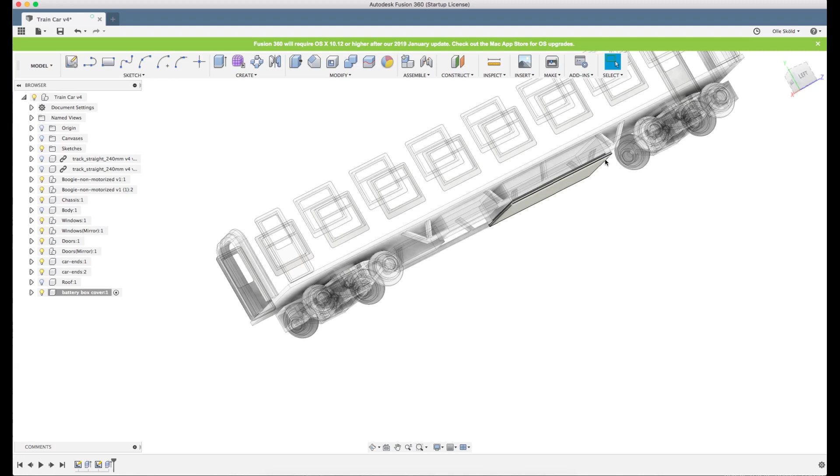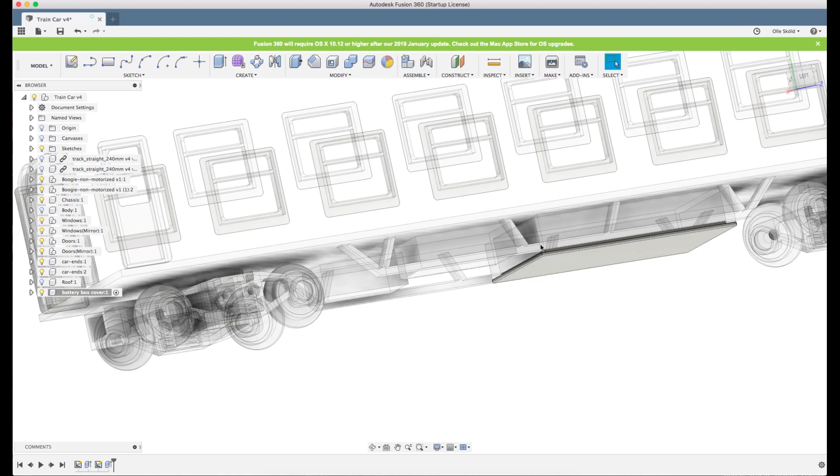And there's also another way. If you have a LiPo battery in here, you can extend the cables and have a charging cable coming out here in the edge, and then you can just glue this tight. I'll just leave it like this for now because you can adapt it. You can adapt it how you want, and that can be done with regular tools, just drilling a hole where you want the cable. I think that's easier.

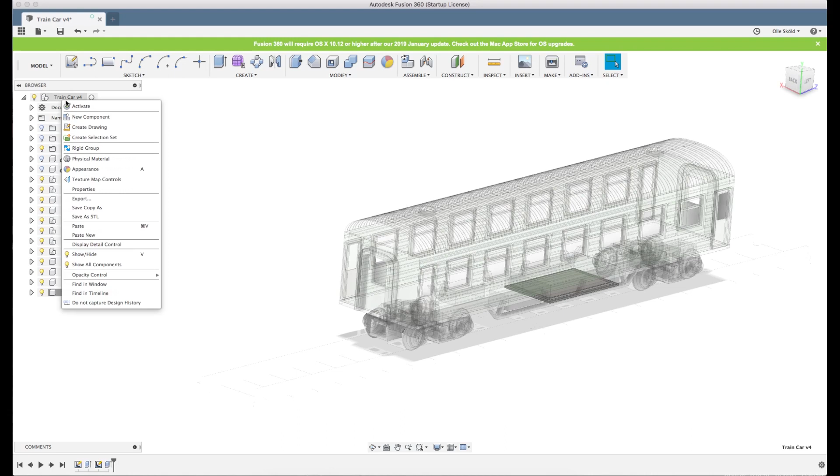So let's just see how everything looks now. I think we're sort of done. The roof looks a bit too... what do you say? I'll add a couple more of these round things, so it looks like a bit more is happening on the roof.

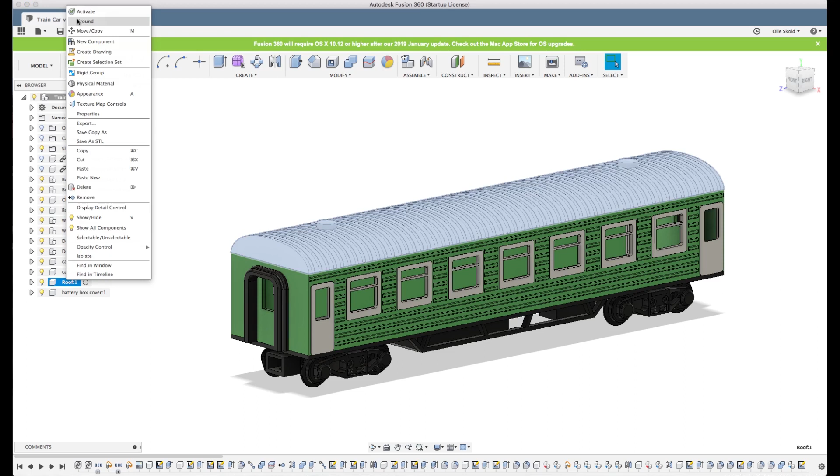So I will go back to this sketch, and there's another thing you can use here. If you want to work on one component and there's a lot of stuff in the way, you can right click on the component and choose isolate, because that hides all the rest.

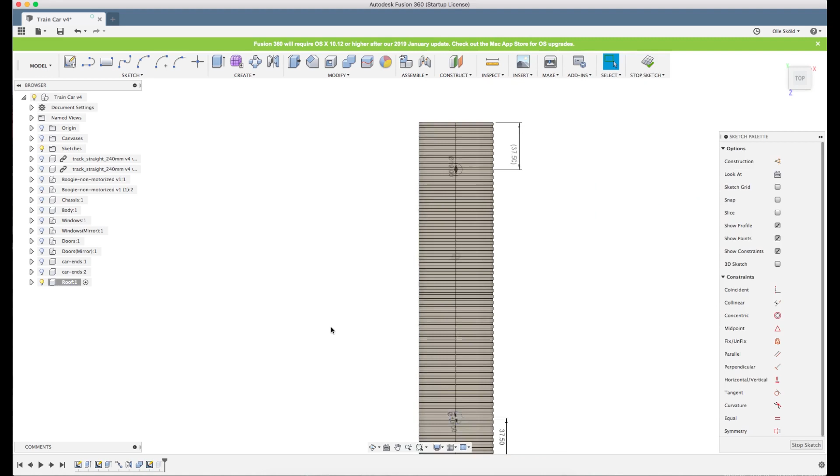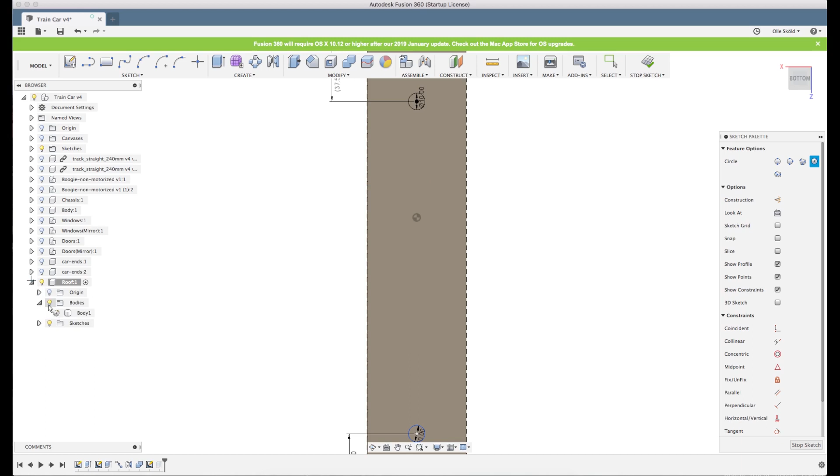And I click on the sketch, and let's see. There's tons of references there from all the things we did. I'm wondering why the center line actually snaps here, but not... Oh, now it does. Huh, that's strange.

So let's put, we can put 3 more of these. Yeah, this is really strange. Now it snaps. It didn't do it before. Yeah, Fusion has these kind of strange things happening sometimes.

You can see now it's not snapping, but if I just hold it over here, it starts. That's weird. Oh, I messed it up. Oh no, I didn't. So let's see the dimensions here.

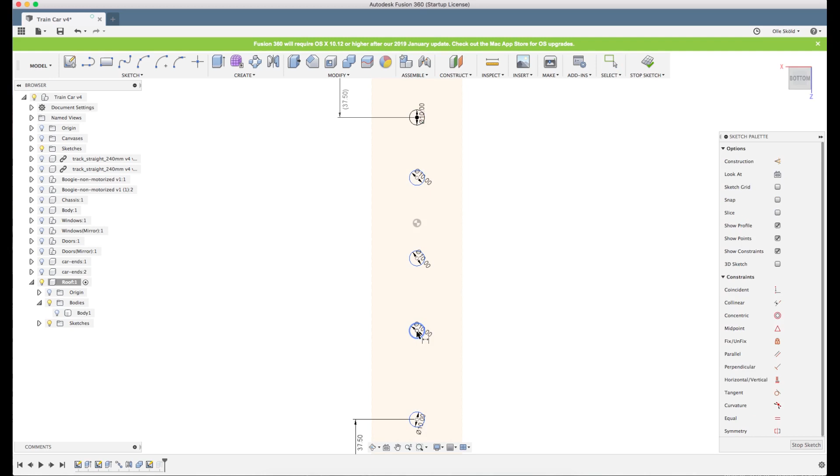Let's just make it 60 for now, because I thought I'm gonna do like this. I'm gonna see how much we have here. We have 199.

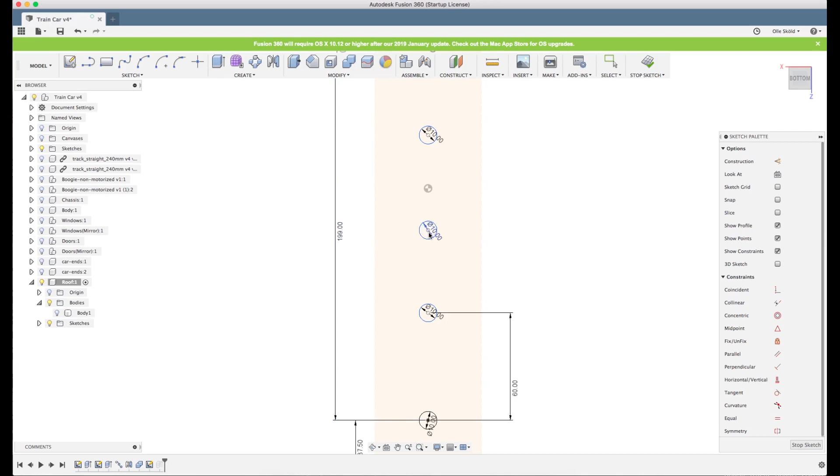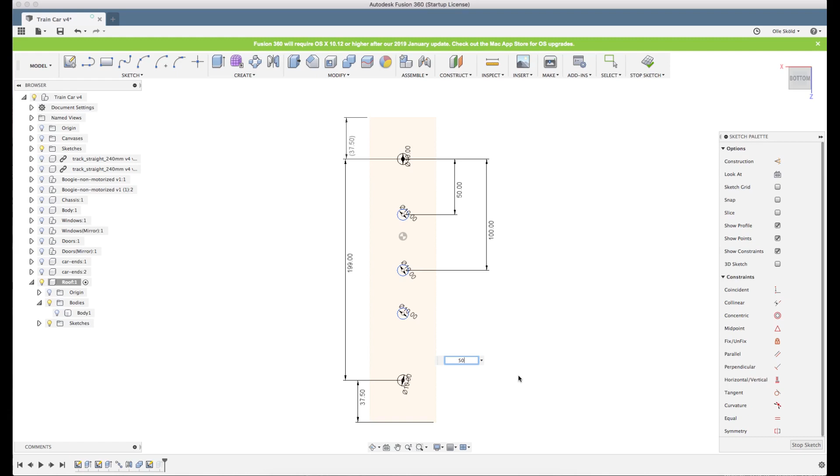So with that said, we want to place this at around 100. That's close enough. And then we want 50 here if we want this to be at an even distance, and this one as well. There we go. Now we have a few more of them, and at an equal distance.

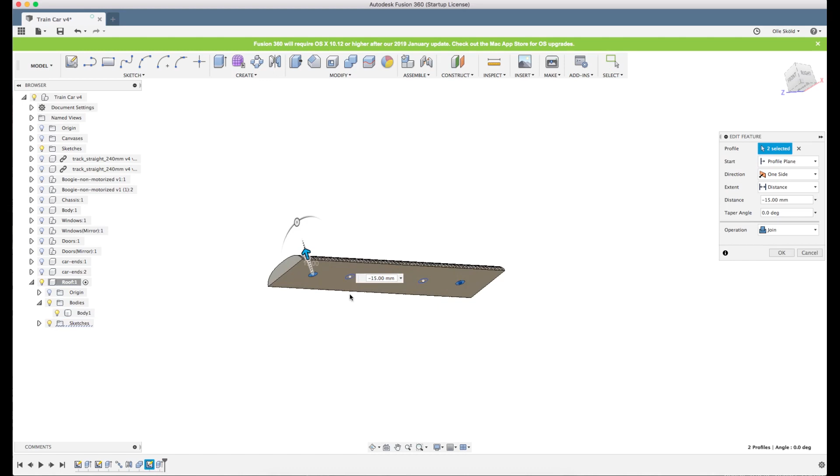So let's see what's going on. Let's double click on this extrude again and choose these new circles we made. There we go. Now it looks like a little bit more is happening there. That's good. I think we're done.

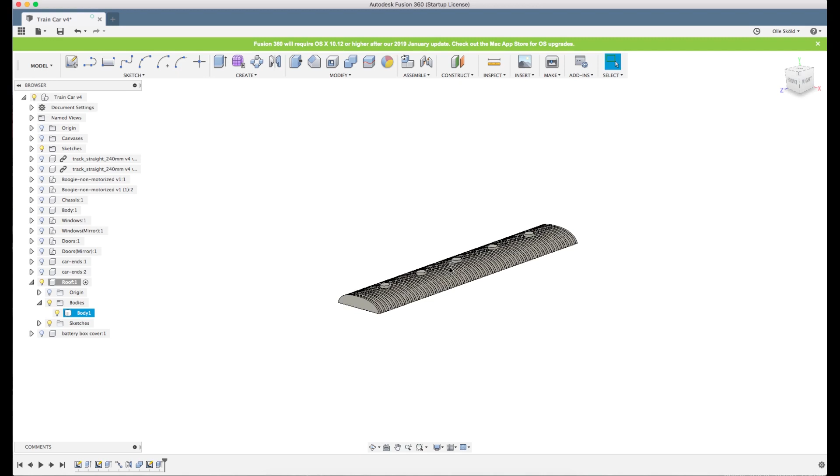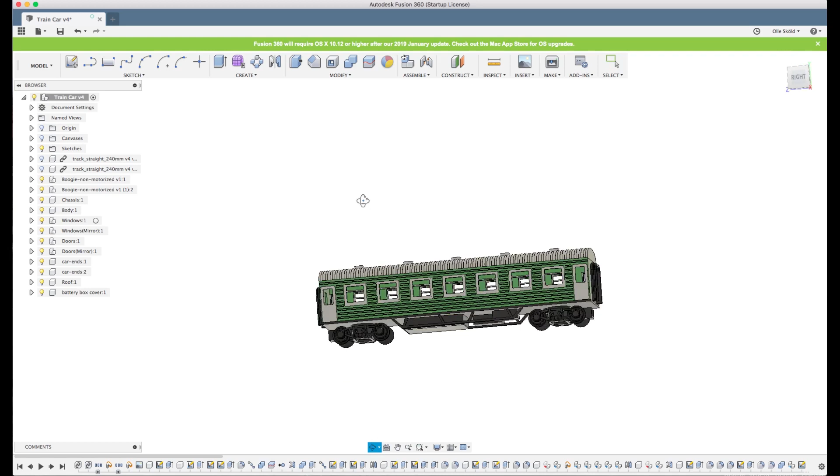So now we're gonna see how we split this and arrange it for 3D printing. You can right click and unisolate when you're done if you did isolate something. And we click activate on the whole thing, so we see how it looks. It looks pretty good in my mind.

We can take a look in perspective as well, and also we can highlight the track again, so see how it looks with the track. That's good enough for me.

Now I can show you a few things to keep in mind here: when you put a name on a component, it does not put a name on the body, so the body only has a number. So what I try to keep in mind is I give these a name, so when I export them as STLs I have a consistent name, so I know which one I've exported. I call this main body, because all the ones that don't have a name are called body, so if you call it body, you don't know if it's Fusion's name or yours.

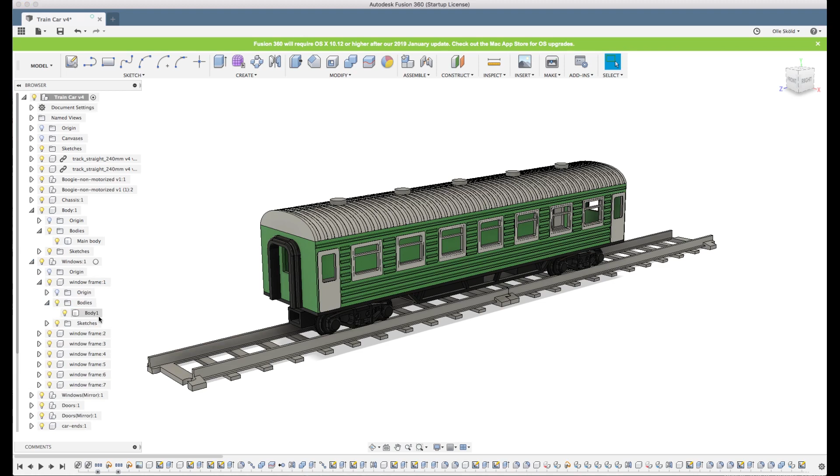Then we take one of the window frames, and now we can start exporting them as well as we go. Frame parts, window frame, and we right click and export as STL.

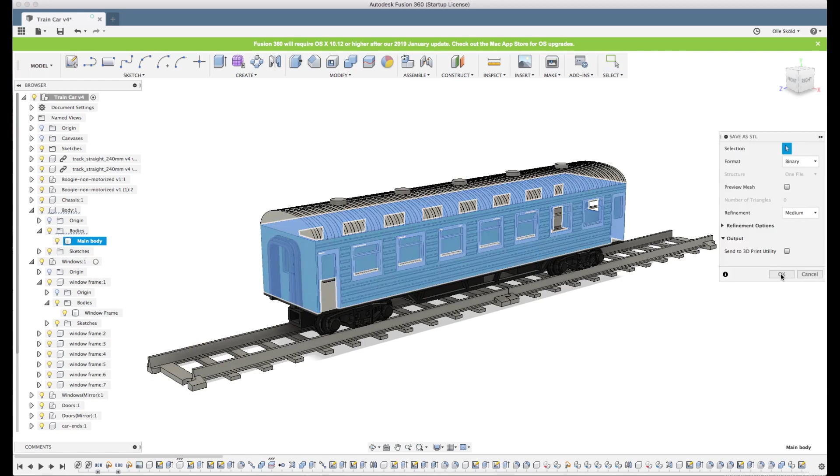Now there are situations sometimes where it will actually not work, where you'll get an error message when you try to export as STL. That means there's something wrong with the geometry, and it's hard to say exactly. This could be a million reasons, so it's impossible to give a general tip for that. But you just have to go through the geometry again. One tip is that if you have complex geometry like paths and things, you can try to remove some things and then try to export, and that way you can pinpoint which feature is preventing you from being able to export it.

Oh, I didn't export it. And we have the ends. Oh, that's weird.

And then we have the roof, and before I export the roof I will do some tricks to it. I will show you a way to adapt it for 3D printing.

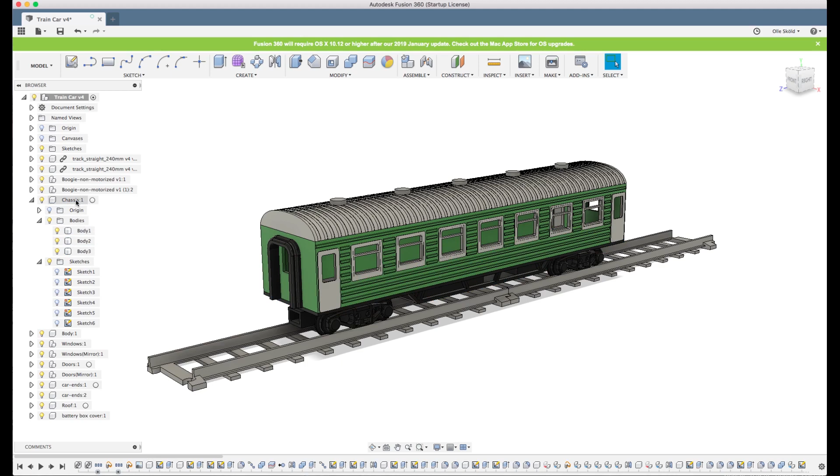And I see now that we did not actually finish this. We have to combine the bodies here. We were too fast to make the battery box and stuff, so now we will activate the chassis and combine these three geometries because they will be printed as one.

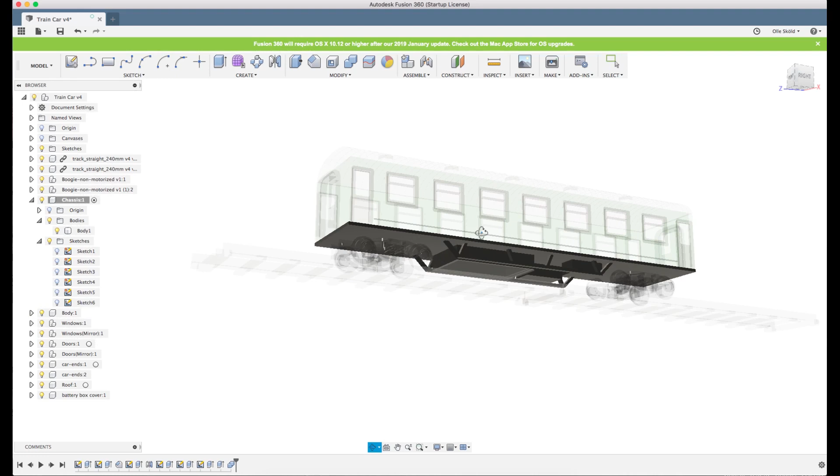Oh, there's actually one thing more I can show you that can be of interest here. Let's deselect the chassis and I will try to show you. On the bogies there is a plate that is rotating. That's the interface against the chassis, and that actually has a small thing here - I don't know what to call it, but this can be a stop to prevent the bogies from freely rotating.

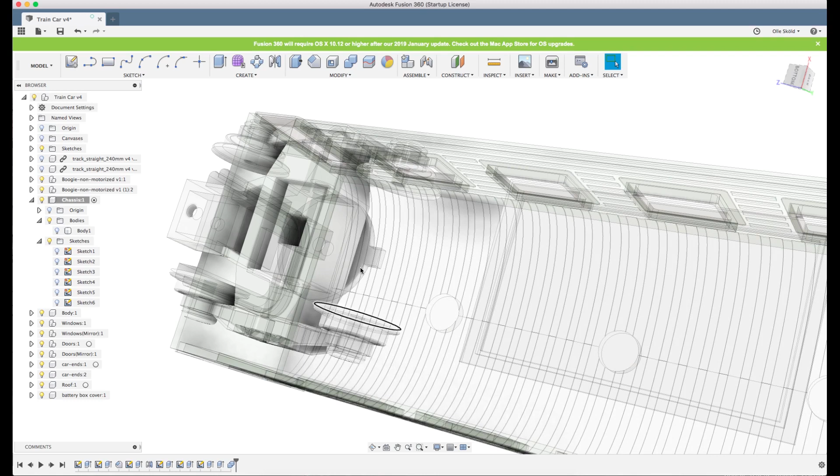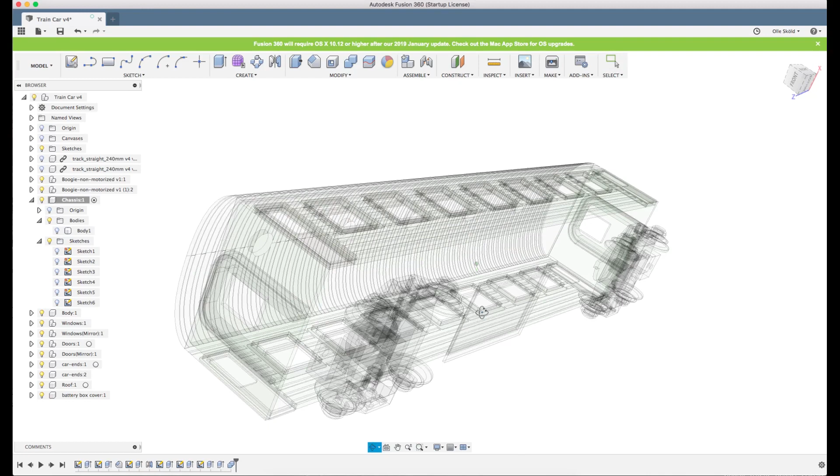The reason for that is that it's easier to place it on the track if you have a maximum angle here that prevents these from rotating freely. It's not a must, you don't have to have it. You can have it plain like this, and just put an M3 screw in here and screw it to the chassis - that's good enough. But I placed it on some of my cars to prevent the bogies from just freely rotating, so you could do that if you want. I'll leave this like this for now.

So let's export the chassis as well.

So now it's only the roof left, but we're gonna do a trick with it to make it easier to print. I did that with the other passenger car that I have on Thingiverse. I can just show you first how that looks.

With this one, to get this really nice surface on the roof, I split the roof into several pieces. So it prints like this in 3 pieces, and it prints vertically because that makes the shape of the roof round. If it was printed horizontally, you would get the layer lines here, which would be really ugly. So that makes a huge difference for the result. This is without any treatment.

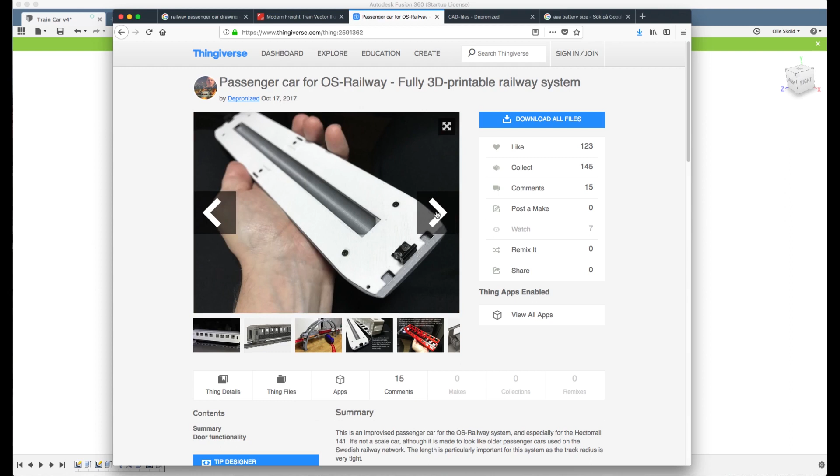And you can see here that this is a bit more advanced design because you have these rooms for cables and for the lights and stuff. It also has doors that you can open and shut. But you can of course put more time into this. This is just a basic tutorial to show how this process, how you work with this.

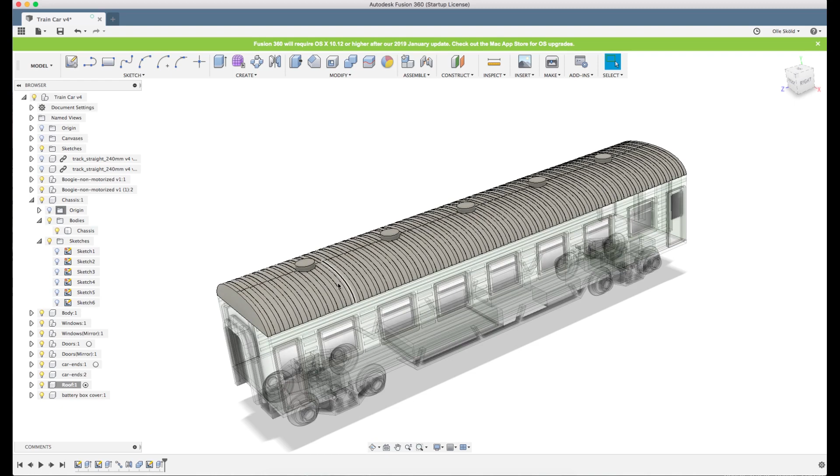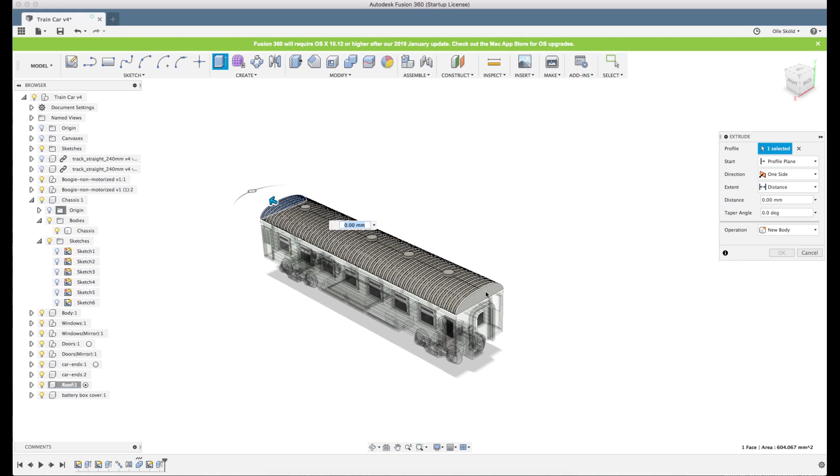So let's do the same thing with the roof here, but I will only split it in 2. Let's just see how long we made it - this is just an ugly way. I click on the edge and I click extrude, and then I click here. And if it wasn't for the million references there, it would go fast, but no, Fusion needs to think - oh, 274 millimeters.

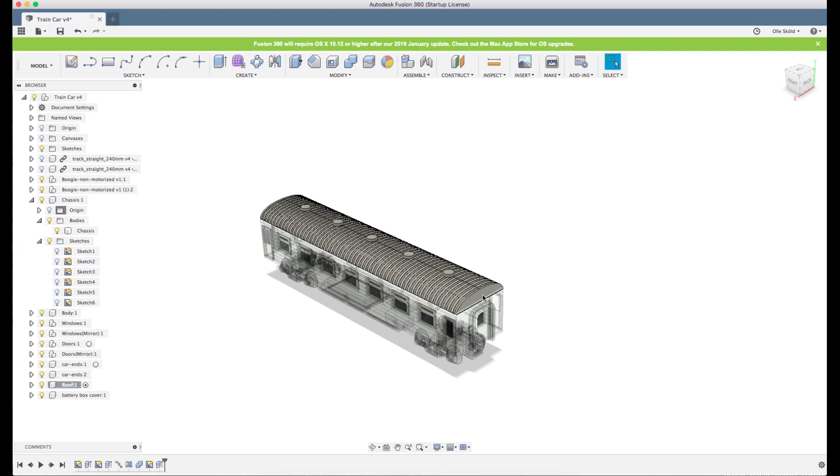So what I will do, I will put a plane. If I right click here on the edge and I create an offset plane, and I put this right in the middle at 137. That's right in the middle.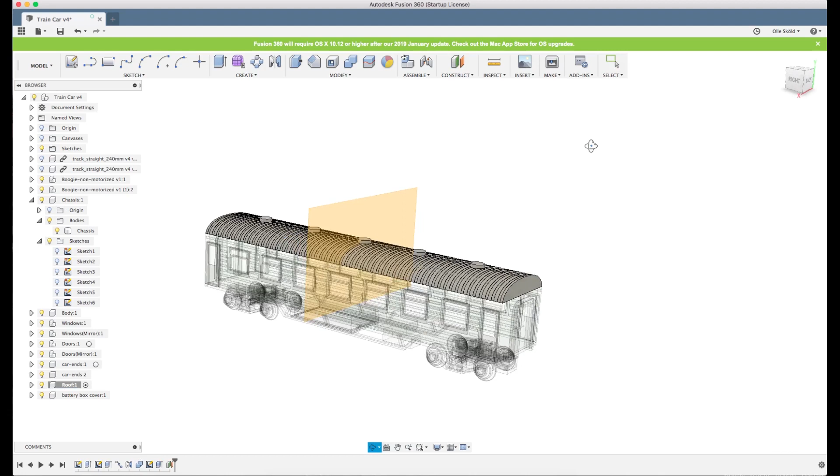So what I do now is I will actually make a copy of the roof body. And I will deselect the first one so I have the original left there, because now I will really mess with the new one for the printing. So I will split it in half. I already had the body selected, so if you didn't have it selected, just click here or click on the body.

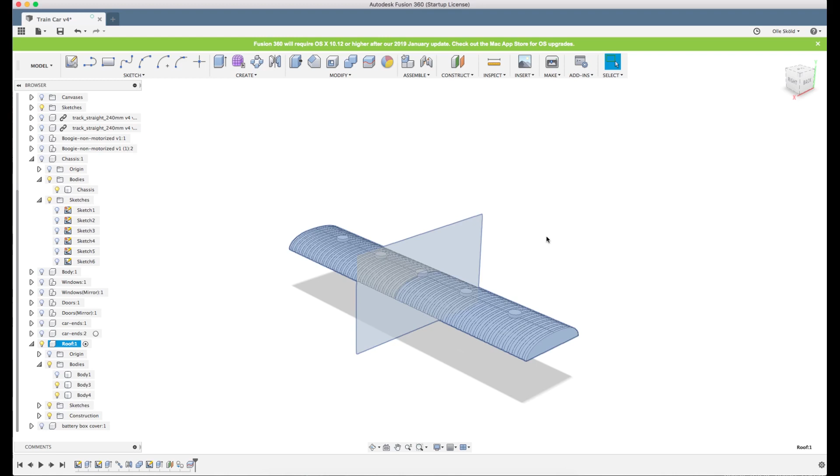Then with the splitting tool I would use this offset plane that I created. So now it's split in 2, and I will isolate this part so it's easier to work with it, because what I will do now is put both these vertically. Move.

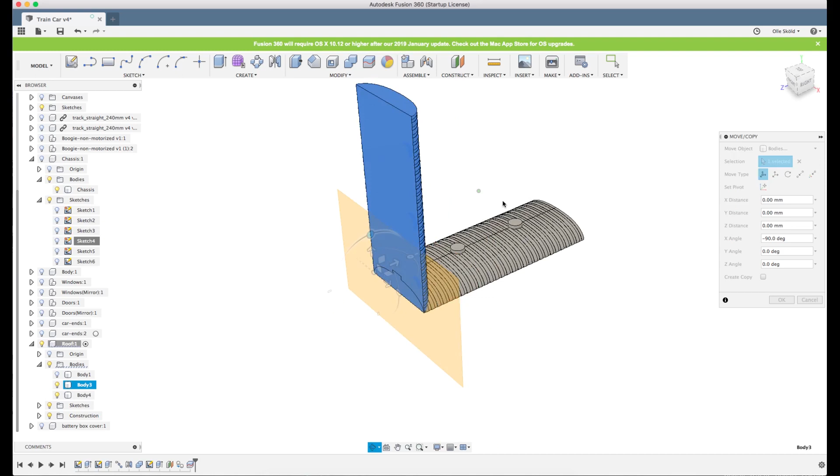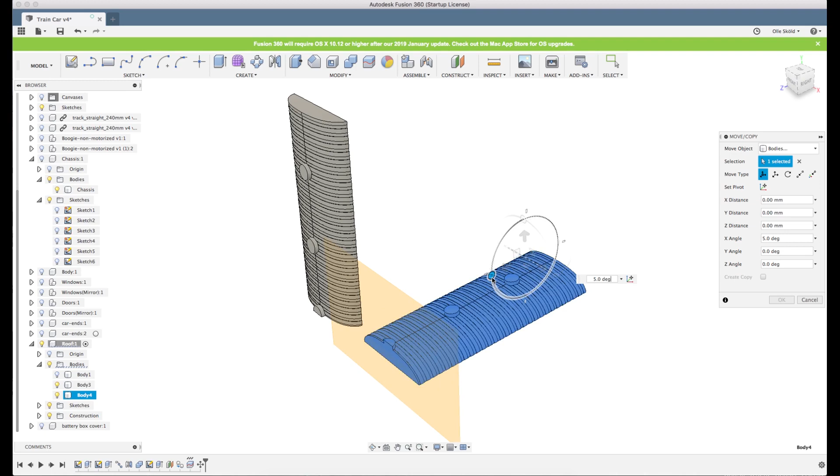I move it 90 degrees, and roll it around 90 degrees, or 270 degrees, sorry, like that. And I will take the other one as well and move it. I have to do it like this because I want this centerpiece, the small protrusion there, to be on the print bed, so that's why I'm turning it this way.

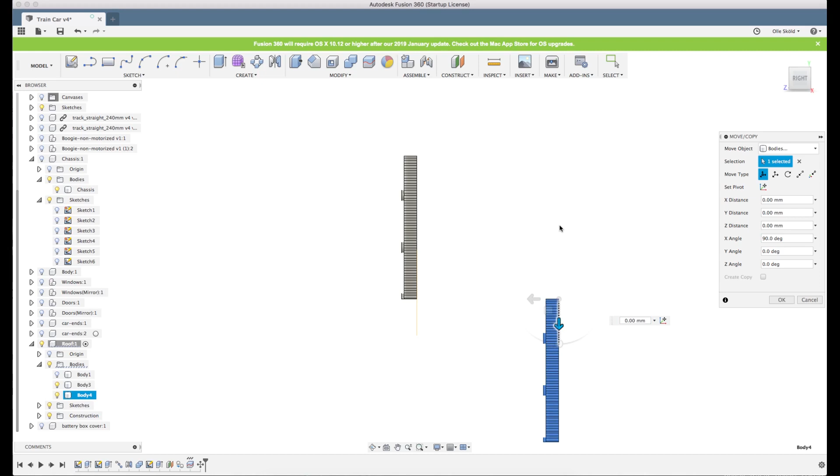Oh, I still have perspective. I don't want that, I want orthographic view. Let's first turn it around 180 degrees.

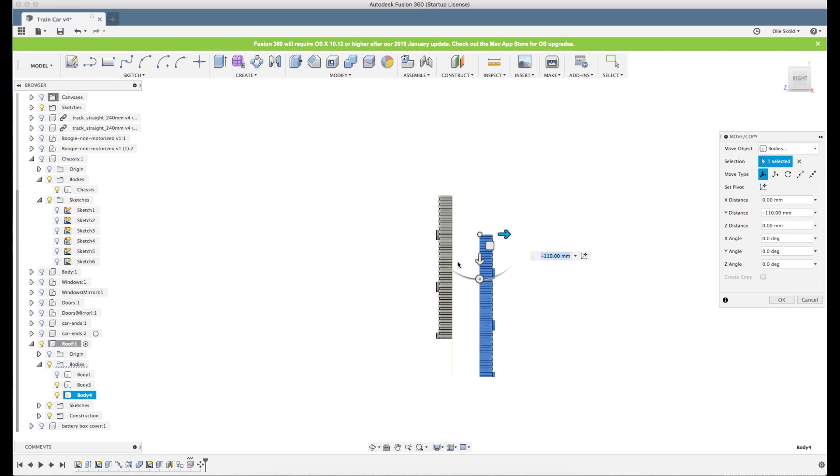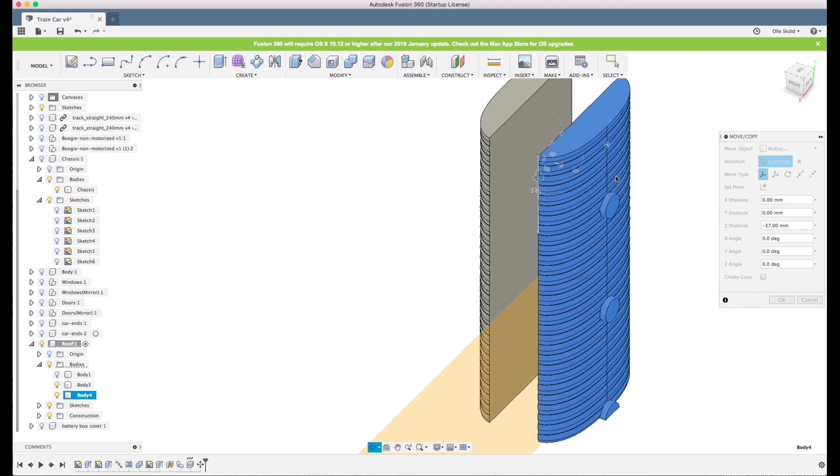Let's move these closer, but not too close, I'm gonna show you why. There they are, exactly the same height, and they're in the same place as well. So that's good, so let's keep them like that.

And now we're gonna do the weird part of this. Fusion has to think a bit first. So yeah, let's click the surface here and create a sketch.

And now we will create a support structure that will hold these two together while they're printing. And we want it to be 0.4 millimeter wide. Oh, 0.4, not plus 0.4, because that's usually one nozzle width.

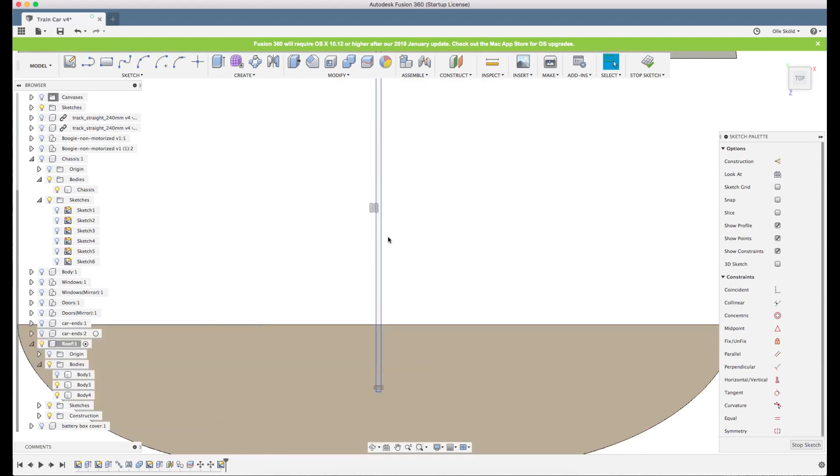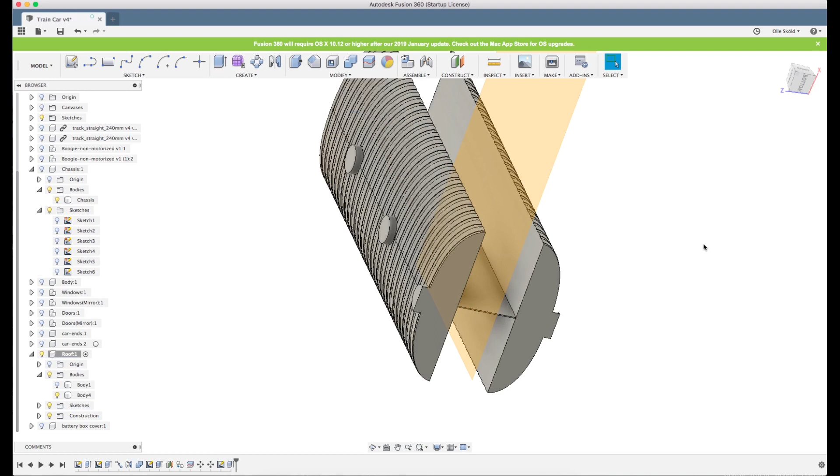And we click E for extrude, and we click the arrow, and we click here. Now Fusion thinks we want to cut, but we don't want to, we want to join. There we go. Now the reason we're doing this is that, oh, now we can see we have some small anomaly here. They're actually not at the exact same height.

We'll see if that actually matters when we're putting them on. You can see here that it's actually, let's try to fix that.

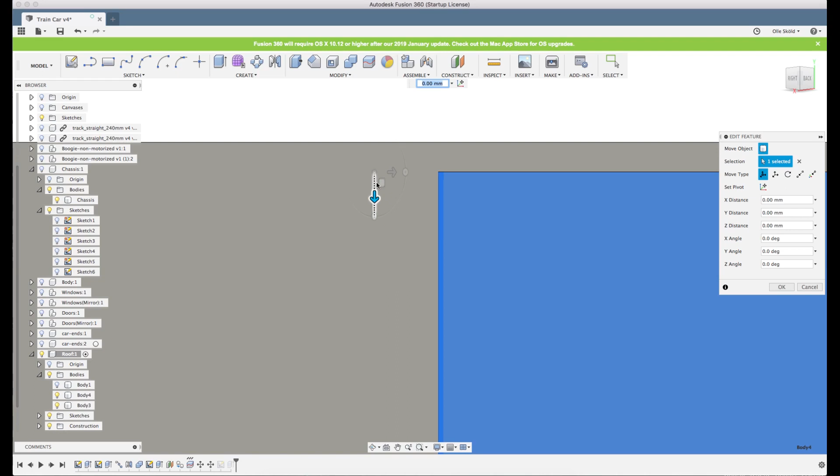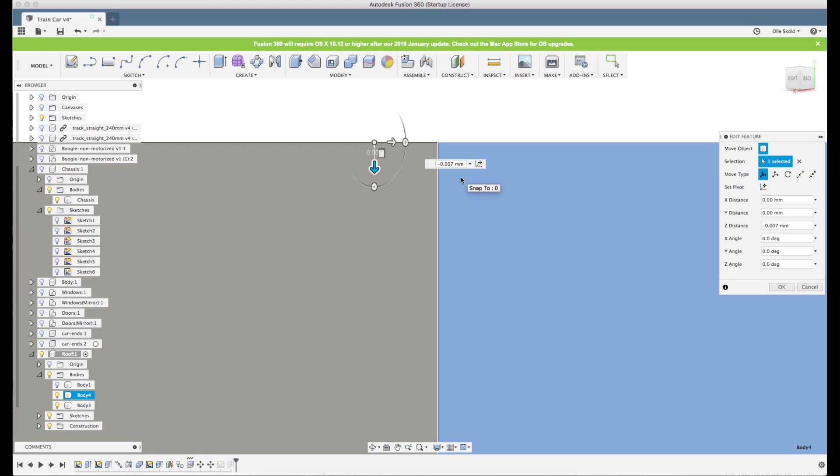That means some of the dimensions we had in the beginning were not exactly right. But we zoom in as much as we can and we try to fix this. This is what you get for not putting in all the dimensions. I think this is good enough.

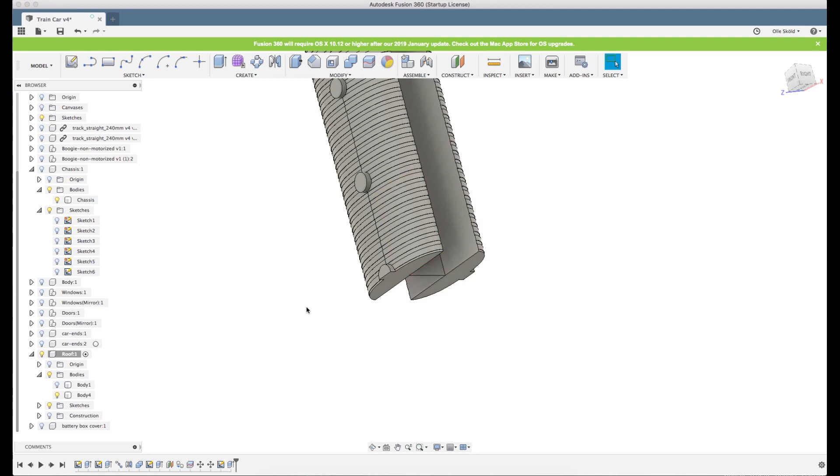A lot of times it's worth to have a few kinks here and there instead of being super precise with entering all the dimensions everywhere. This gap that is here, still here, is too small to matter for the printing. So let's just keep it that way.

So now we have, this is all one body, and what it does is that you can print it vertically like this, and the support in between here will mean that it's less likely that the printhead will knock one of these over. So we print this as one part, and then you just break off this 0.4 millimeter support in the middle. You just use a knife or a sanding paper to clear the remaining parts of it. And this works really well.

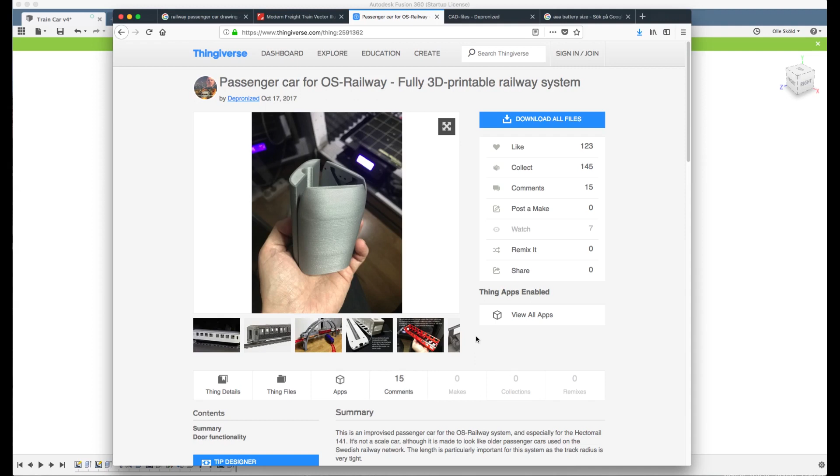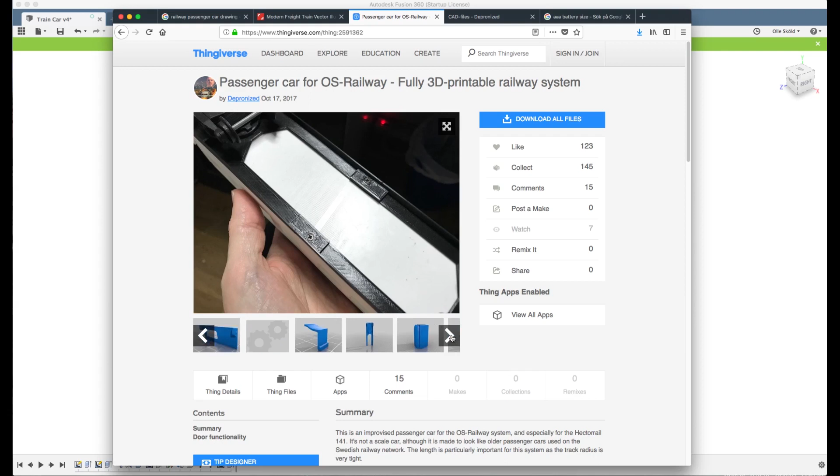I maybe have a picture of the STLs here. Yeah, here they are. It is the same kind of thing going on here, but it's 3 of them. But it's the same principle.

So we'll export this. We'll call it something first. Roof print adapted.

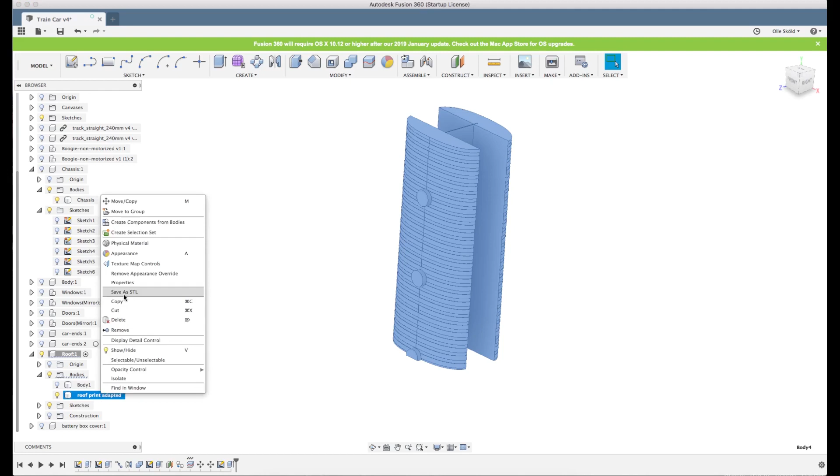Also, if you split it to even more parts, there's less risk of it being knocked over. This is still quite high, so a bit of a gambling, but then don't use too small layer heights here, because that will mean trouble. Use at least 0.2 millimeter.

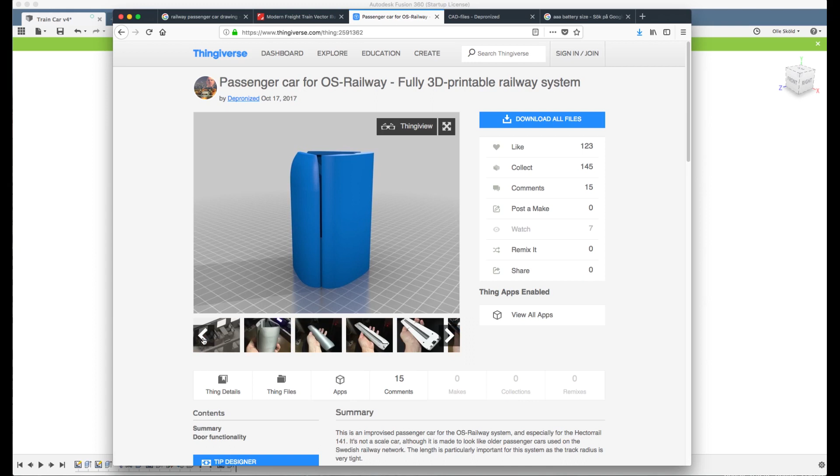The ones that you saw in the picture. Oh, sorry, not that one. The ones here. This is done with 0.2 millimeter, and you get a surface like this. I mean, better than this is not desired on my part, at least.

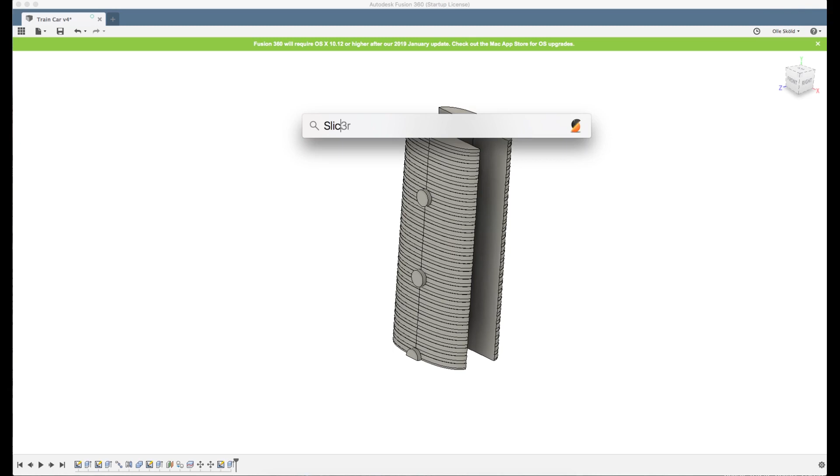So now we have exported all the parts, so let's see how they look in Slic3r. I used the Prusa i3 Mark II, and I use Slic3r Prusa Edition to slice these parts. But if you use Cura it works well as well, but I like Slic3r. I think it's better than Cura. I get better results in it, at least.

So, so let's see. Train parts. Let's first look at the main body and the big parts and see if they fit on the print bed, or if we need to split them in some way.

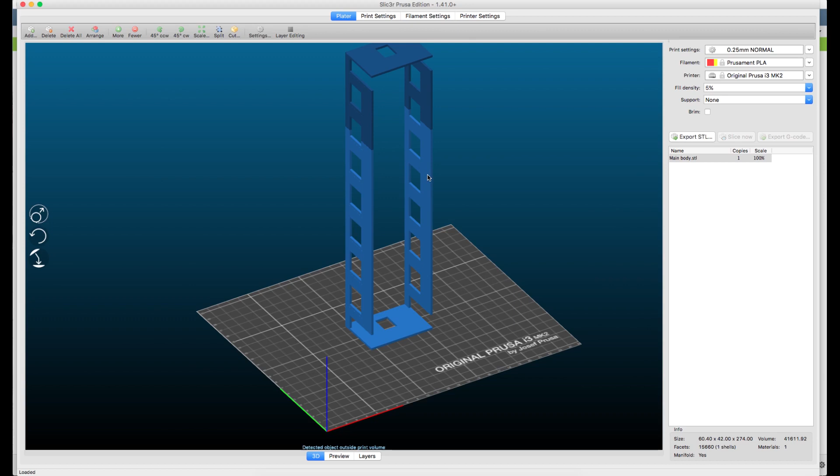And Fusion, as you can see here now, has another axis orientation than the usual 3D printing slicing softwares, and you can change this in Fusion somewhere. I haven't done that yet. I should have, because this is annoying, but you can do it.

So now we're seeing that we might have some problem here. It's a bit too long, actually. It is too long. Or there might be a chance we can fit it in here if we work with the angles.

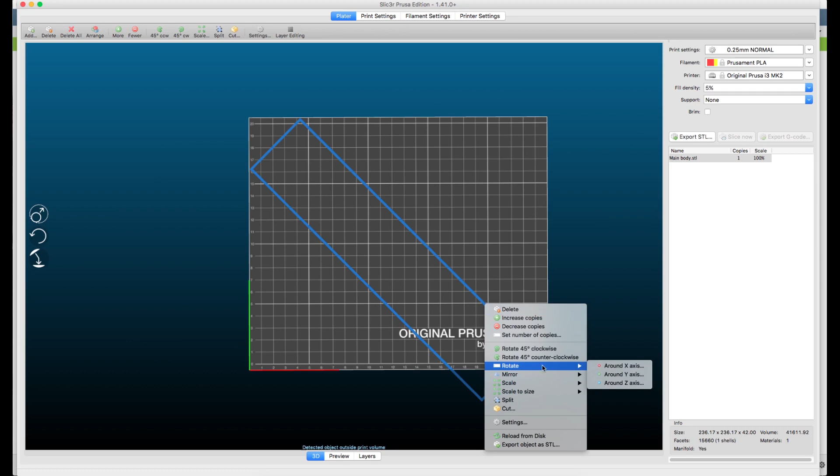That will be no chance, no chance. So what we need is to split it.

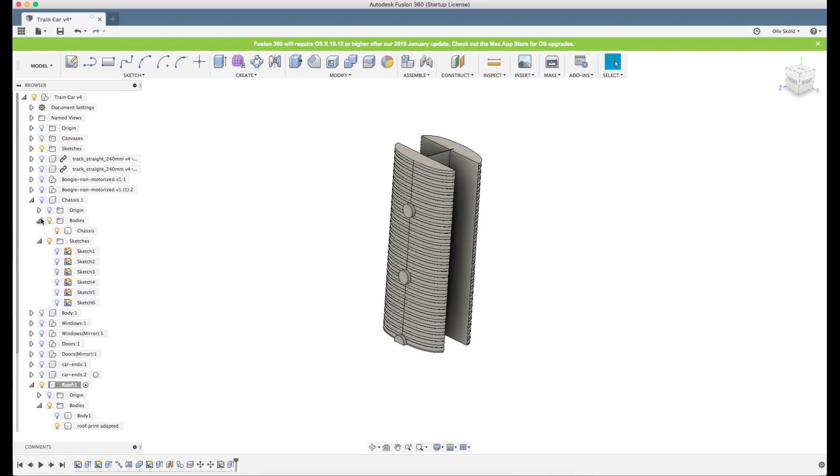So let's go back to Fusion, and let's forget our roof for now, and let's look at the body. We can use the same strategy as we did with the roof.

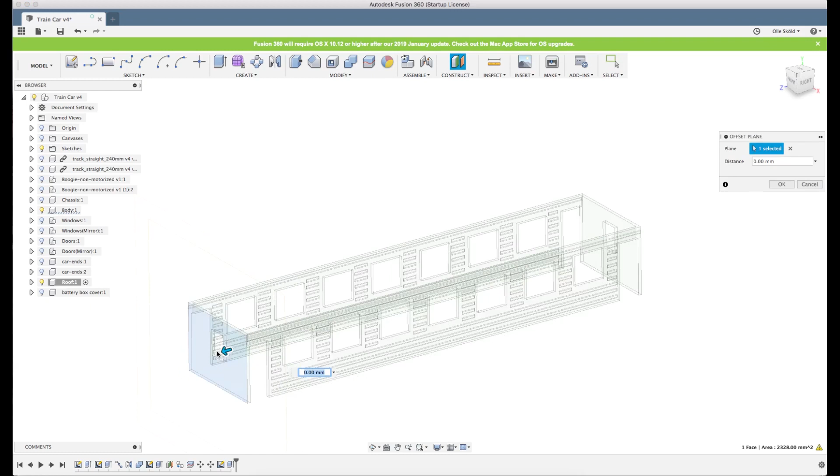We right click on one of the sides and create an offset plane. Oh, wait a minute, first we have to activate the body, so we're working in the body. Offset plane.

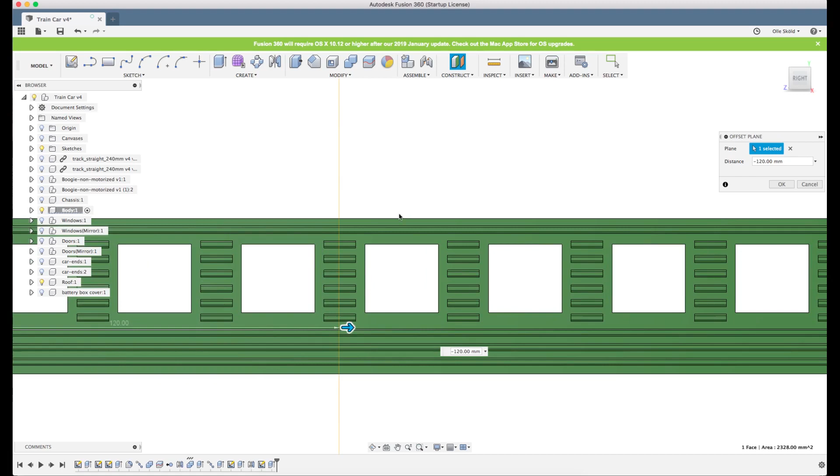Now we don't have to put this in the middle. What we want to do is put it in the middle in between some windows, because if we put it in the middle of a window, then the window frame will be messed up, because we want to print this with bridges. So it's really important to split it at a solid part and not in a window.

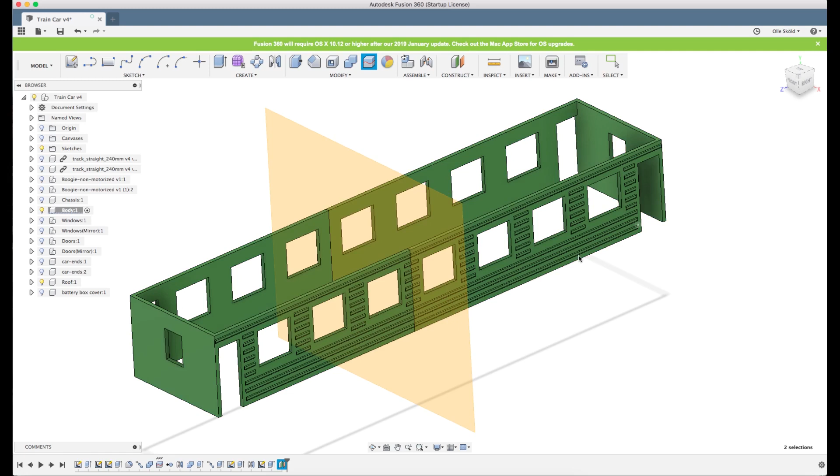So we'll split it here, split body, and we select the body, and we select the plane as a tool. There we are, and now we know that our chassis will also be too long.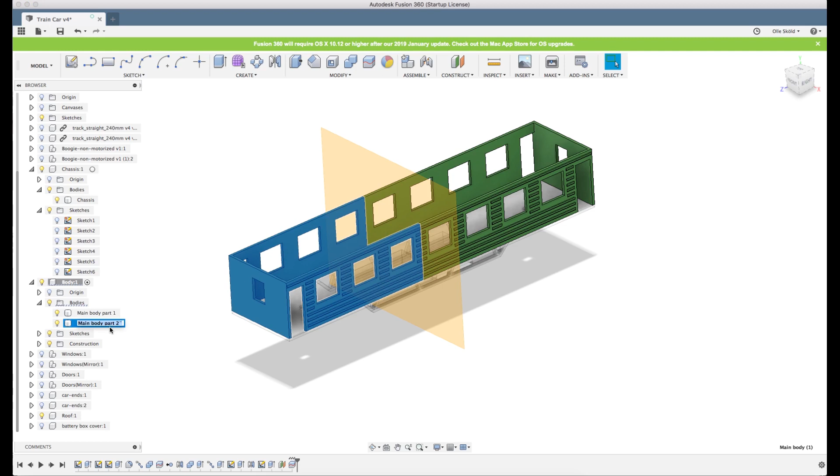But we will start with exporting the body. Part 1. Export these.

So now it's time for the chassis, because we know that will also be too long, so we have to take care of that. Now you can see a bug in Fusion here, because we have the body active, but it's still showing the chassis as if that was active. So that's a bug actually. But we'll activate it.

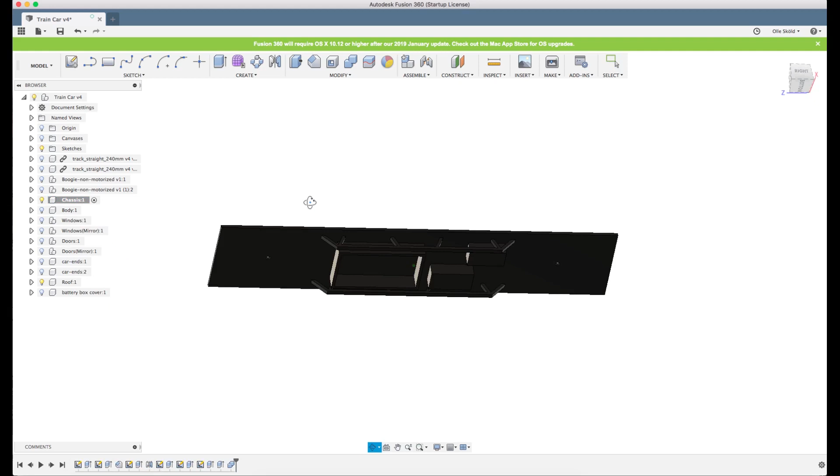So let's see where we want to split this. I don't think we want to split this in the middle, and there is actually a good reason not to split these parts at the same point, because we want them to strengthen each other. So we don't want to split this frame in the wrong place.

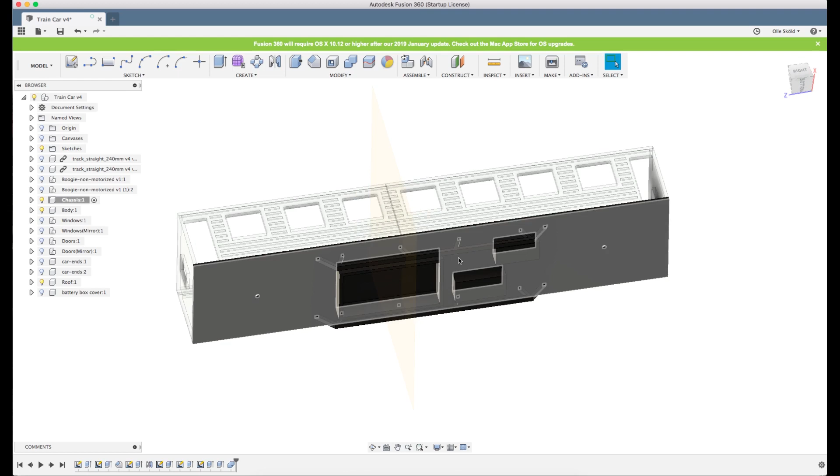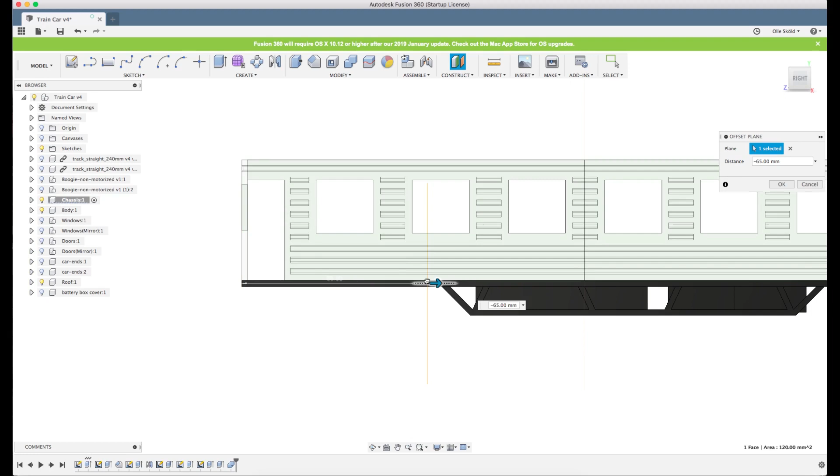So we'll split this at 2 points outside these parts on the bottom. Let's make a plane here, an offset plane, and let's put it just here. There, 65 millimeter.

And also let's put another one. Also 65 millimeter.

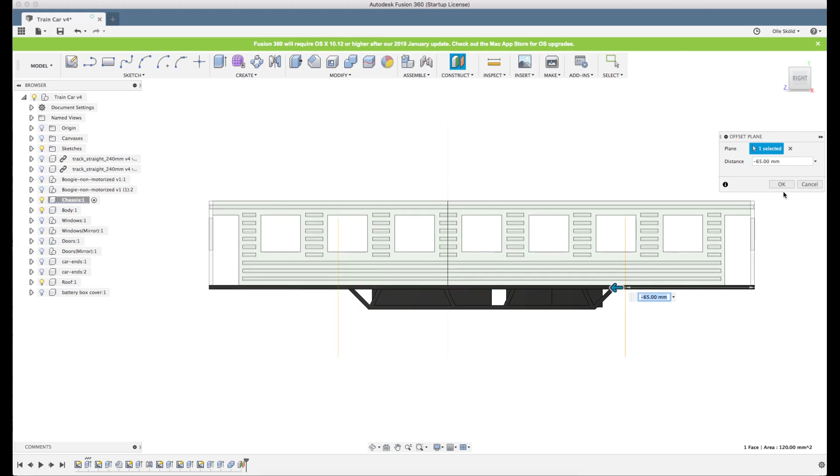Now if you're really thinking fast, you will also have realized that these ends will be the same, so it doesn't matter, you don't have to export both of them because they will be identical. But there might be a chance that you've made some small details. If you're working on a scale car that is actually different in the ends, it'll make sense to do like this.

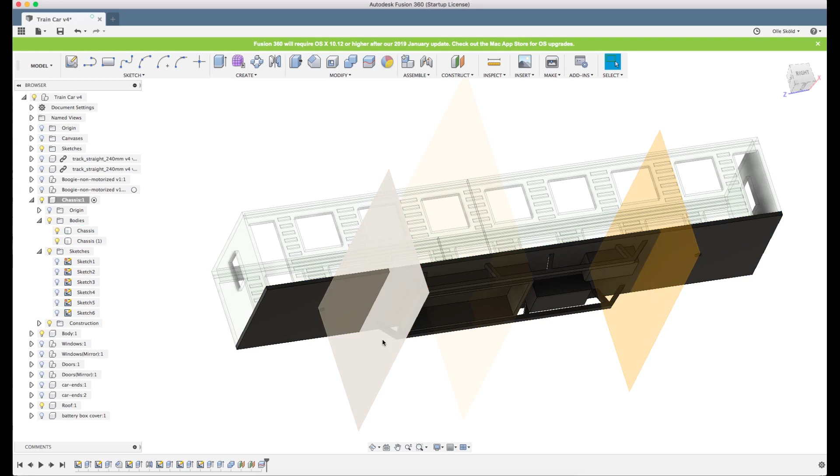So let's again split body, and we choose the body, and we choose the splitting tool. I'm not sure if we can... no, we cannot select several splitting tools. We can select several bodies to split, but not several splitting tools.

But even if we're only using one of these ends, we will need to split the main body into pieces. So let's split it with the other tool as well here. There.

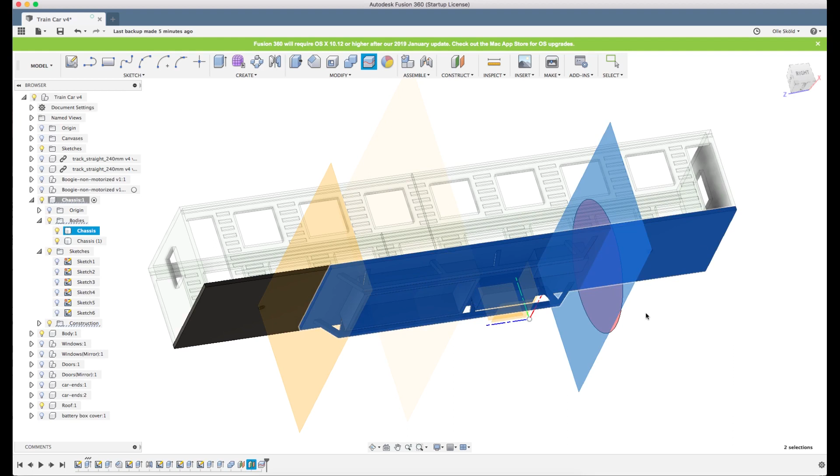Maybe one of these, maybe this... it was short enough to fit on the plate. That could be the case, but we like symmetry, right? So we'll do it this way.

This end, I will call that. I will call this also end, but end 2. So we'll export this, and we'll export the end.

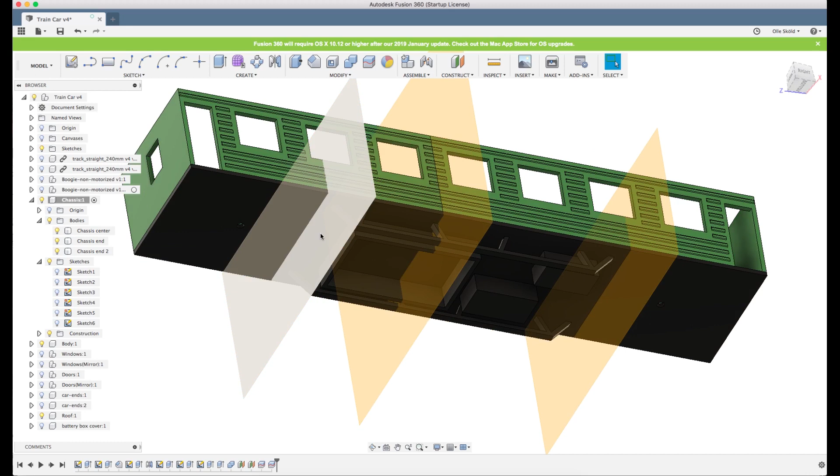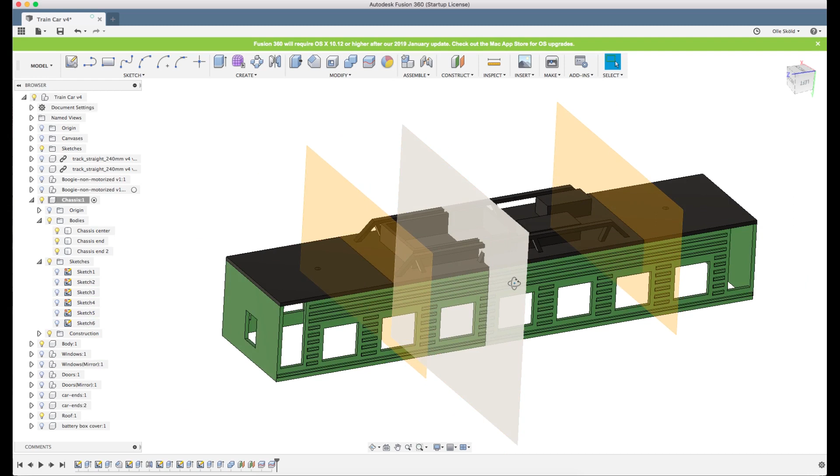Now what you do when you build this later on, I would first glue the chassis parts together. But it depends, you could also glue the body parts together and then put it upside down and then glue the chassis parts. That will probably be easier because then you have the surface already. So there's different ways, but put the roof on the last part, because as long as you don't have the roof, you can put this upside down and you have a flat surface to put it on. That makes it a lot easier to work with.

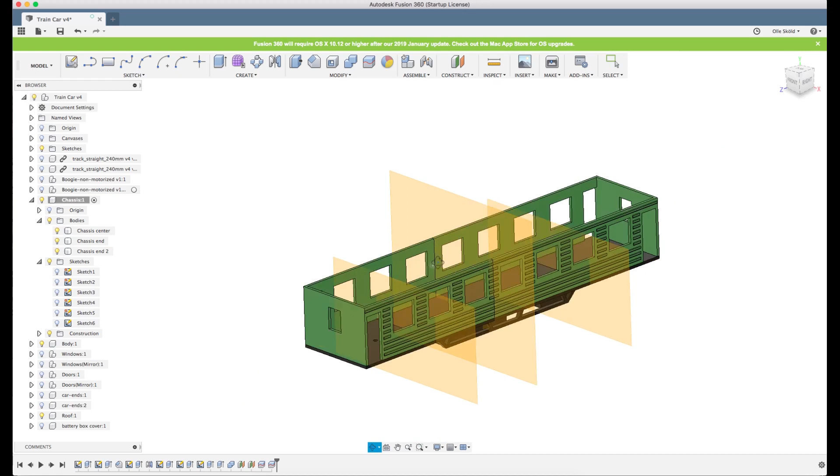So I think we exported everything we need now. So let's go back to Slic3r and let's remove that one. So this is main body part 1.

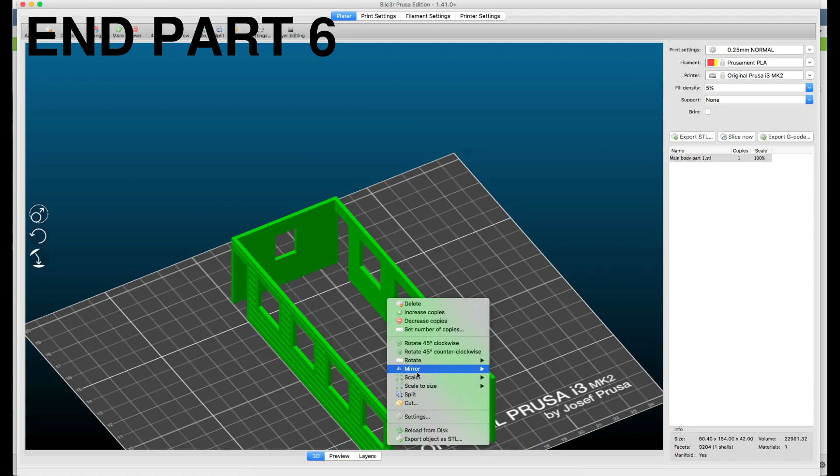And let's see, let's turn it around, so like that. That's perfect. And now I will export this back as an STL, because then I get the orientation right in the STL from the beginning next time I import.